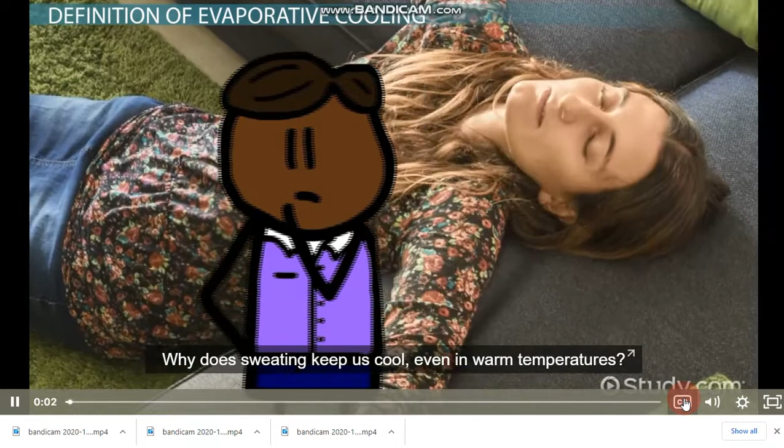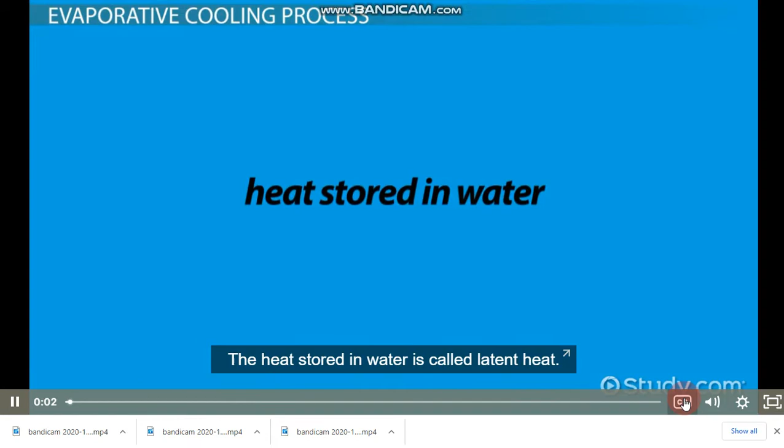To understand evaporative cooling, we also need to understand heat and evaporation. Water can hold a lot of heat without changing temperature. The heat stored in water is called latent heat. Water absorbs the heat from other surfaces, making them cooler.

When water absorbs enough heat, it evaporates, or changes from a liquid to a gas. The gas leaves the surface, taking the extra heat with it. The result is a decreased amount of heat and thus decreased temperature in the surface. This is how evaporative cooling works.

Think of how boiling noodles on the stove works. The stove transfers heat to the water in the pot. The water absorbs the heat and then leaves the pot as steam, taking the heat with it.

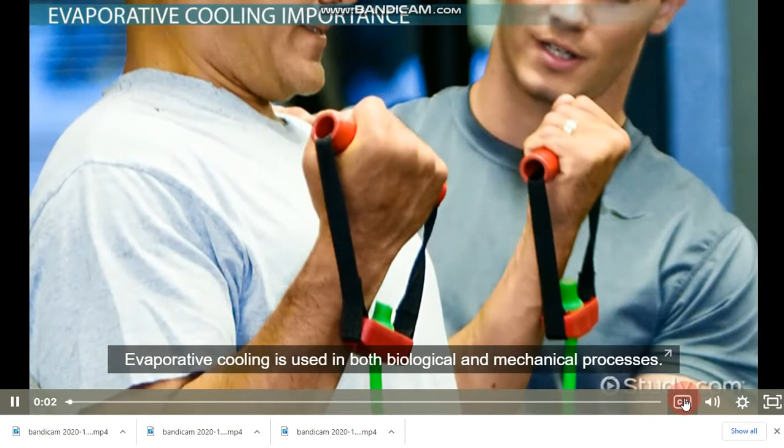Evaporative cooling is used in both biological and mechanical processes. Our bodies are designed to sweat to release heat and keep our body at its natural temperature when it gets too hot. Our skin releases sweat, which contains water. The water absorbs the heat from our skin and it eventually evaporates, taking the extra heat in our skin with it. This decreases our body temperature and keeps us from overheating in the summer.

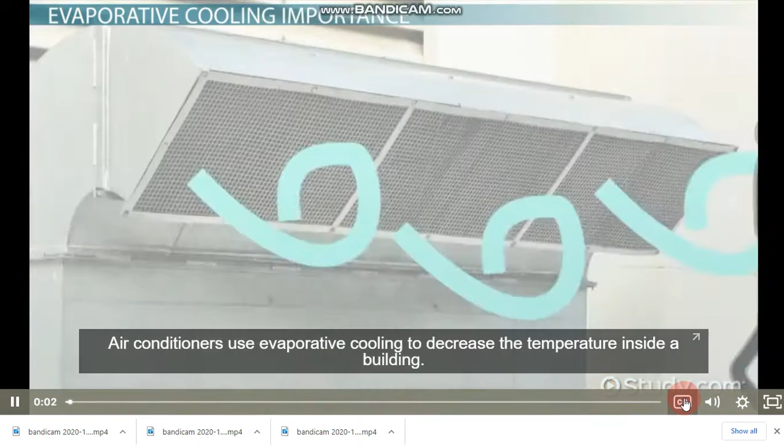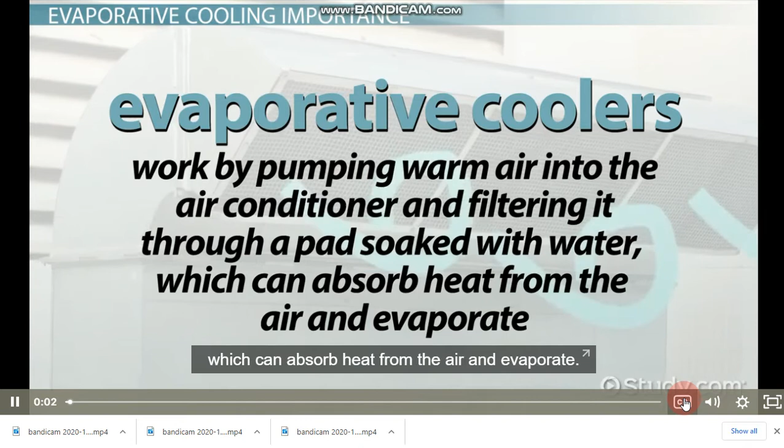Air conditioners use evaporative cooling to decrease the temperature inside a building. Evaporative coolers work by pumping warm air into the air conditioner and filtering it through a pad soaked with water, which can absorb heat from the air and evaporate. As the water absorbs heat from the air, temperature decreases and is returned to the room.

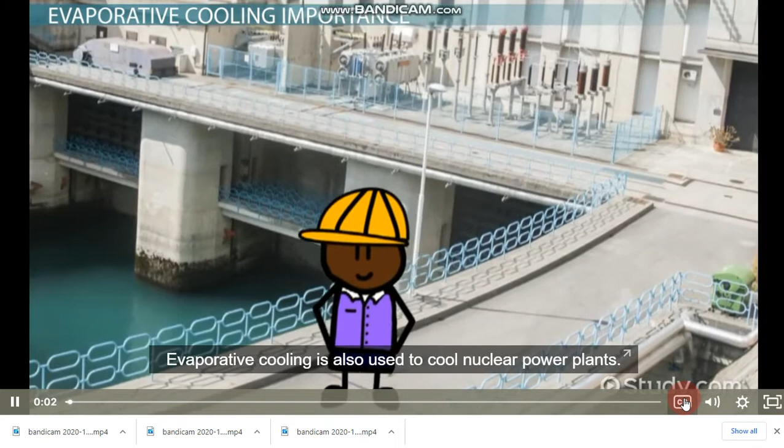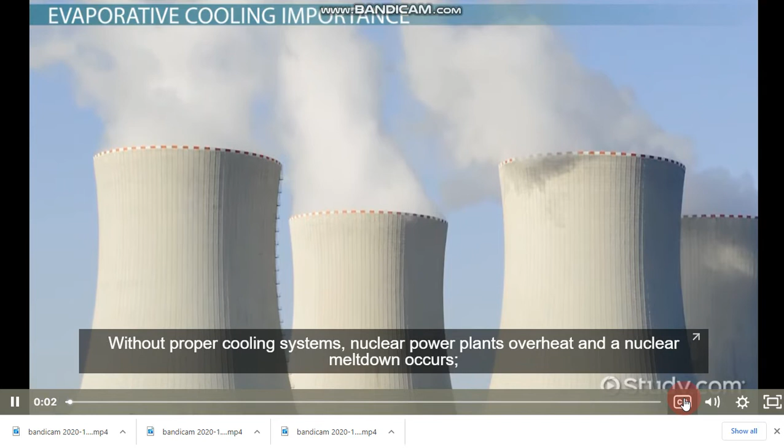Evaporative cooling is also used to cool nuclear power plants. The heat from the nuclear core flows into water cooling systems. The water absorbs the heat and is released as steam from the power plant. Without proper cooling systems, nuclear power plants overheat and a nuclear meltdown occurs. Radioactive material can escape into the environment.

Evaporative cooling only works if the water can evaporate into the air. Air has a maximum amount of water it can hold. This is called humidity. When the air is very humid, there is not much more room for water to evaporate. Thus, the warm water on the surface can no longer evaporate into the air, and the heat stays with the surface and the water. This is why you probably feel a lot warmer on a hot, humid day than during dry conditions with the same temperature. The high humidity prevents the water from evaporating, and thus, no evaporative cooling can take place.

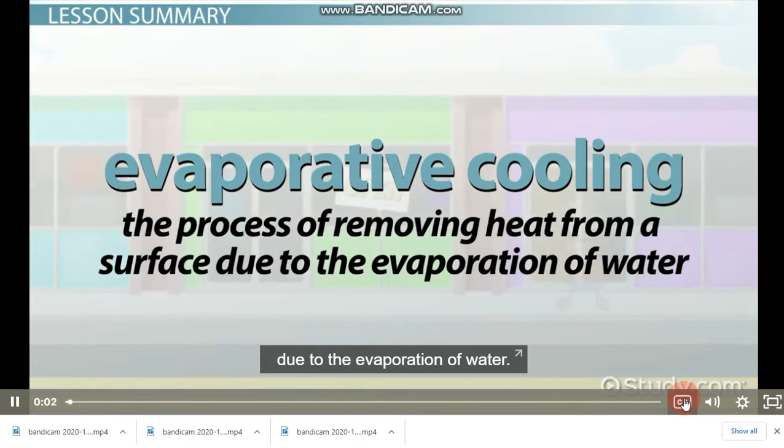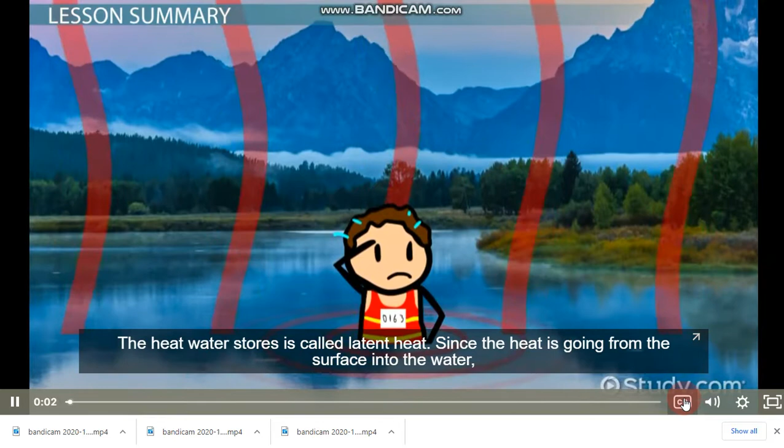In summary, evaporative cooling is the process of removing heat from a surface due to the evaporation of water. Water can absorb a lot of heat without changing phases, allowing it to remove heat from the surface it is on. When water turns from liquid to gas, it's called evaporation. The heat water stores is called latent heat. Since the heat is going from the surface into the water, the temperature of the surface decreases.

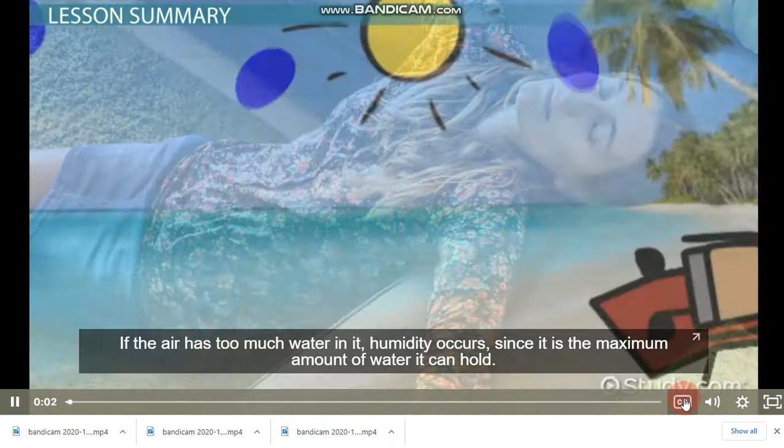Eventually, water absorbs so much heat that it evaporates, taking the heat with it and leaving the surface with a lower temperature. If the air has too much water in it, humidity occurs, since it's the maximum amount of water it can hold. Evaporative cooling is important for keeping our bodies at a normal temperature, which occurs through sweating.

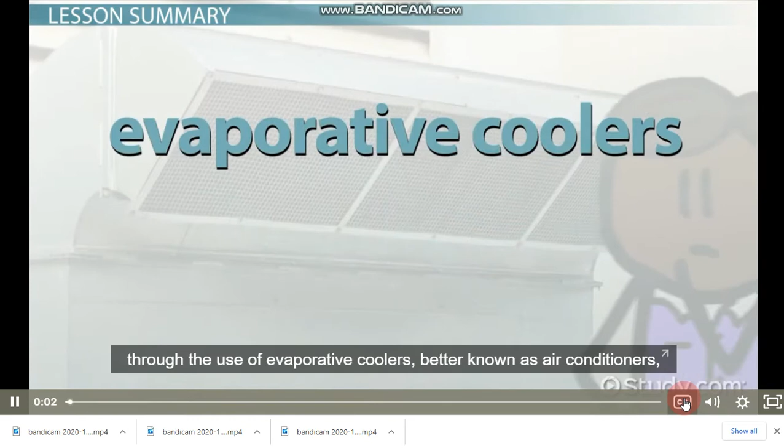It is also important for regulating the temperature of our environment through the use of evaporative coolers, better known as air conditioners, which work by pumping warm air into the air conditioner and filtering it through a pad soaked with water, which can absorb heat from the air and evaporate. This is similar to how nuclear plants keep their reactor cores cool.